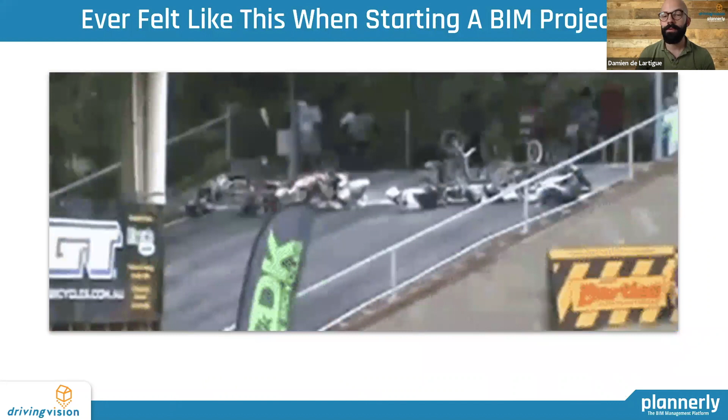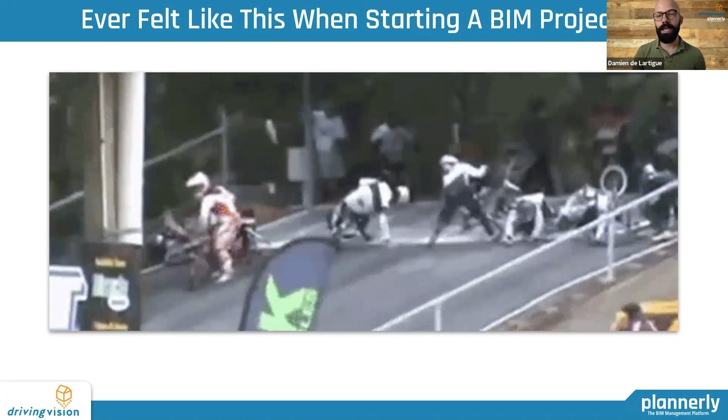So let's start with why did your BIM fail? There are many reasons why your BIM might fail, and maybe it was just a crash right from the start, like these poor guys here. It's actually probably a lot more common than we'd like to admit. People just want to get started and get working, but there are a lot of challenges and hurdles to overcome. Everyone's got different capabilities and ideas. Let's talk about why some projects start like this and what can cause those failures to take place.

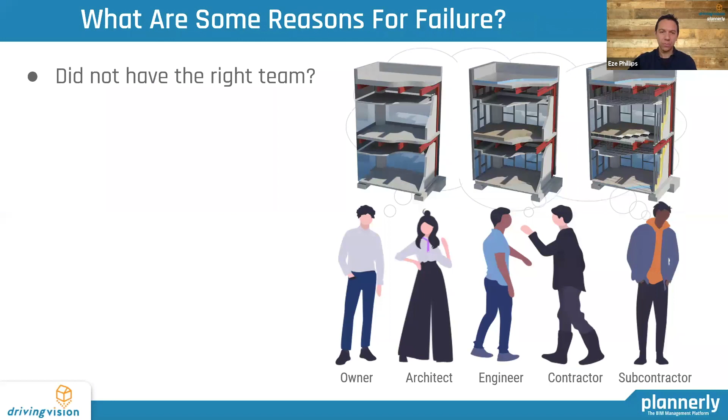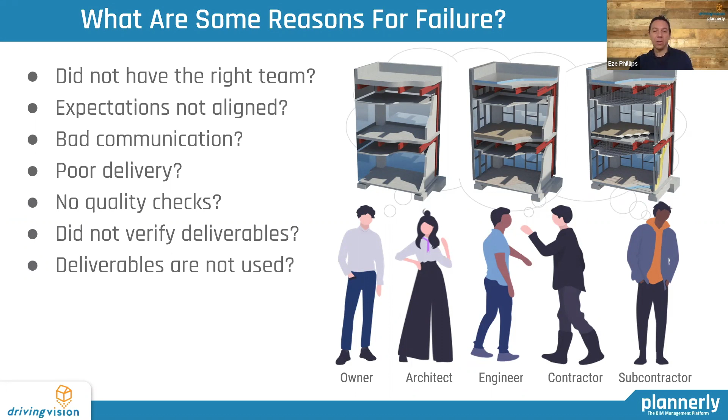Sometimes we don't have the right team involved, and often it's because different expectations aren't aligned properly. It can come down to bad communication between the different parties, poor delivery, no quality checks in place, if we didn't verify the deliverables, or if they weren't even used. There can be a lot of different reasons why, and this can waste a lot of time and effort if we don't get things right.

So firstly, why is it difficult to align expectations? Well, one of the major issues is bad communication, and we see this a lot. There are a couple of examples here of really poorly defined scope. The first one is just one line in a contract where the owner is requesting something, basically saying, 'Can I have some BIM, please?' in the form of a loosely worded statement without any clarification.

But the one we see here defines milestones, and if you're using LOD numbers, a progression from one milestone to another that just goes from 2 to 3 to 4 — it just doesn't always work like that on a project. And that's something that happens more often than you might think. It really does lead to bad communication, and it can have a negative impact on the project right from the very start.

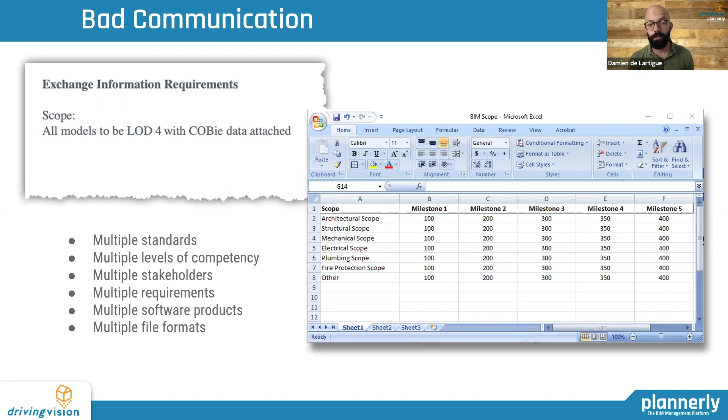So there are many variables to consider. There are a lot of standards out there, all trying to define the elements, the geometry, the accuracy, the reliability, and so on. But as you can see in this chart, we have to decide how much information and how much scope to include. So you add up all the variables, and now you're supposed to fit that all into 5 categories. That's going to be tough.

You might need to ask: what's the measured accuracy? What's the represented accuracy? What standards are you going to follow? What's the purpose, and why are you doing BIM in the first place?

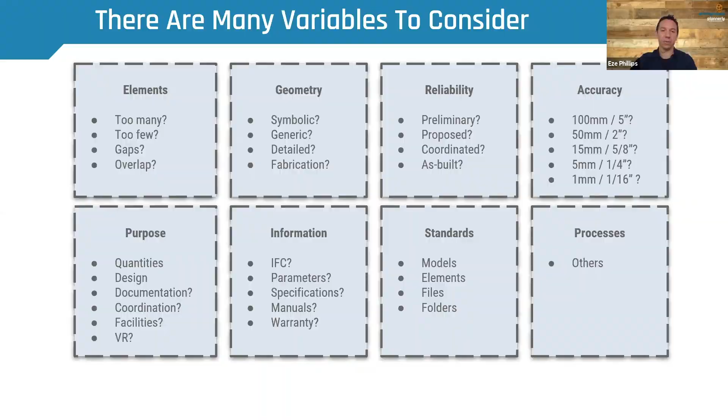So if we did manage to get all that defined, what happens now? Do we just start doing BIM? Is that it? Do we just go? Well, that would be great.

But in reality, without planning, without arranging the sequence of events, and without understanding when those deliverables are going to occur, we end up with bottlenecks, and we get a lot of deliverables that need to be reviewed all at the same time. There are a lot of efficient processes out there that we can use, but if we don't have them aligned internally or have the right tools to support them, we could be wasting a lot of time making sure that they meet the initial requirements that were agreed upon.

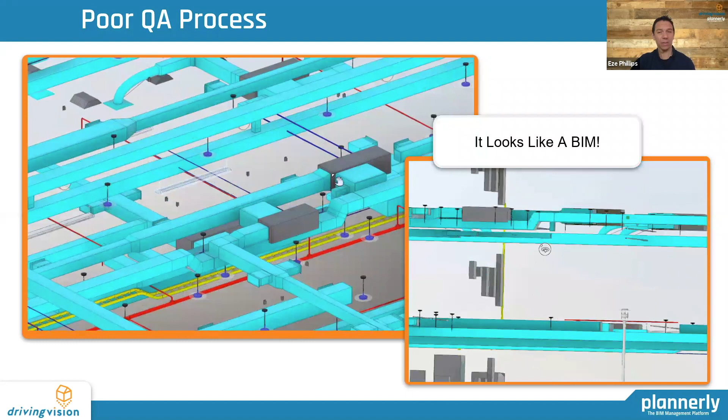So then we need to look at the team, and there are 2 sides to this equation. It's not just the people creating the models, it's also the people requesting the models. Are we competent enough to request the deliverable, and are we competent enough to provide the deliverable? There are 2 parts to that equation.

And competency is quite interesting because BIM hasn't been around forever. So there are new people learning BIM, and they should be requesting, but maybe they need some support in the first few projects. Even if they have a great attitude and pick things up quickly, they still need to gain knowledge over time.

It's important for them to understand where they fit inside a company, what their role is, and what they're responsible for. Knowing this will avoid people overstretching, taking on too much, and making mistakes that will cost time and effort later on.

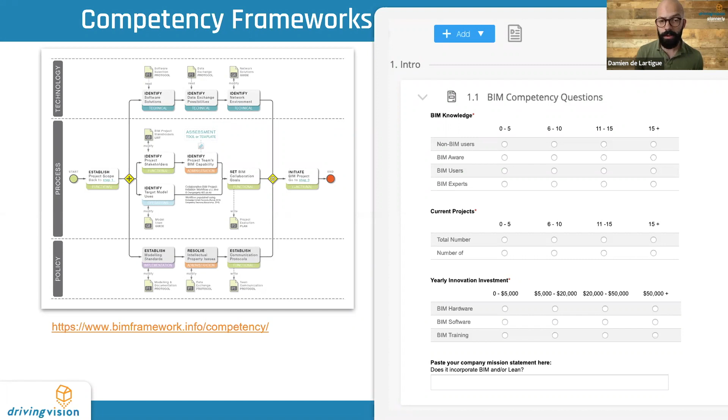There's some really good competency frameworks available. The BIM framework website has some great foundations to build on your own, and some examples, such as the competency questionnaire, which people can send out. This is an example where it asks a company mission statement, and whether that mission statement incorporates BIM and whether it incorporates Lean. So some of these principles incorporated into a company mission statement can really help you understand what that company is trying to achieve.

Let's take a look at what motivates teams. Each team is different, and they might have a different perspective, a different set of reasons, and different goals for doing BIM. They might be an architect, an engineer, a contractor, owner, or service provider, and each of those will have different motivations.

As an owner, I might have read about BIM online, and I might just ask for some BIM. I might want to use it in my design reviews to communicate with the public about what's going on. I might want to sell a property and market that to an external buyer, maybe using virtual reality if someone is in another country, for example. I might be trying to save costs in construction. Maybe I'm trying to optimize my facilities and operations and provide that data to my facilities team.

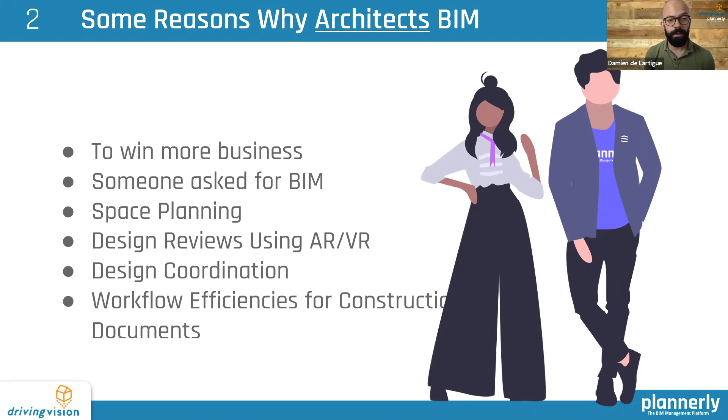So those are some reasons why an owner might be motivated to use BIM. Then there's architects. They want to win more business, keep up with competition, or maybe it's just because the client asked them to use it. And then there's the efficient workflows which they can use and benefit from - space planning, design reviews, using VR between them and the client. Also coordination, workflow efficiencies among the construction document processes, for example. So these are a few examples of why an architect might want to use BIM.

And contractors, they also might want to win more business. Someone else could have asked for it. It could be for coordination to reduce the risk in the construction process, to verify quantities and estimates. Also, it could be for simulations to understand safety or phase planning. These are some reasons why a contractor might be motivated for using BIM.

And then for engineers, again, the obvious one is to win more work just because someone asked for it. But also it can help them with design coordination, system analysis, their bill of materials. And if they have a fabrication team on site, they might be modeling their design and producing that same model for the fabrication facilities. And finally, tracking change orders - so if they already have a bill of quantities and the model changes, you can do a difference in quantities, which will help inform those change orders.

And then service providers - so you have a lot of BIM service providers that are supporting our industry, creating models for projects where there's maybe a gap in the scope. Maybe there's a need for acceleration of the team's capabilities. And really the hope is that they're here to improve our industry more rapidly. So as you can see, there is a variety of motivations for using BIM.

So in summary, many people are using it because they've been asked to do so, or just because they want to win business because it's a requirement on the project they're pitching for. But these aren't really the most ideal reasons for using BIM. What we want to see is people using BIM because they understand and acknowledge that BIM can really help them work better, essentially to gain efficiencies in their workflow. So for the architect, being able to cut 2D drawings much faster, and for the contractor, getting quantities for estimating. There's so many good reasons everyone should be using BIM in their workflow. It's important to use BIM for the right reasons and motivations.

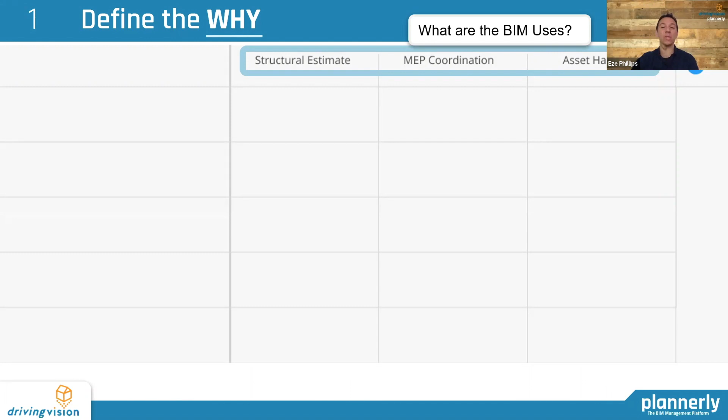We can then define the scope. Each information delivery milestone needs a certain amount of scope, which is really just defining the what, the list of items that we need to use. And then there's how much is required, whether that is LOD or the right level of geometry, the information required. Define what we need at each milestone.

The most efficient and successful workflows we've seen are those that only progress when needed. So if we need something in 2D, we'll get it in 2D. But if that changes and we now need it in 3D, then get it in 3D then. Really focus on when you might need these objects and when they need to progress in detail.

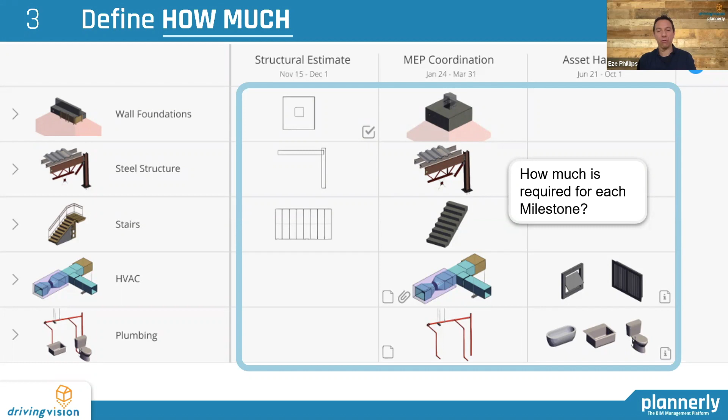So what's the geometry, what's the documentation, what's the information? Define how much of these is required for each information delivery milestone, and also understand who is responsible for it, especially when you have a handover.

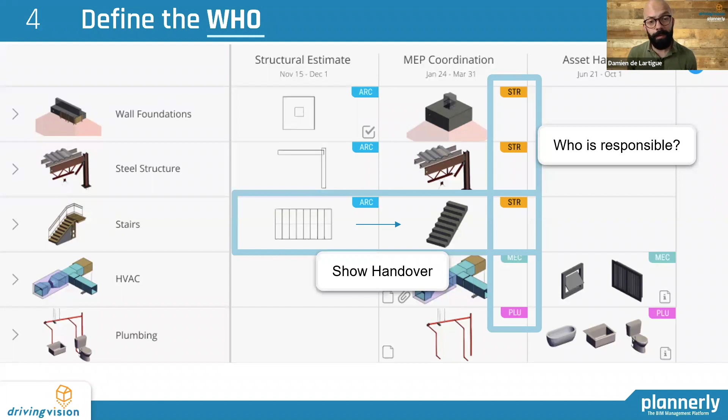For example, with stairs that were required only in 2D for a structural estimate, and then later on at a different milestone, the structural engineer was involved for an MEP coordination that was required in 3D. That's when the 3D modeling for the stairs needs to take place.

We've seen an amazing 53% reduction in issues based on being able to sequence the tasks for each of those milestones in an order that makes sense for the teams, so there's less rework. It's an amazing ability to have a delivery sequence that makes sense, and that way you can put things in place once rather than having to do the same task over and over once you've made a decision.

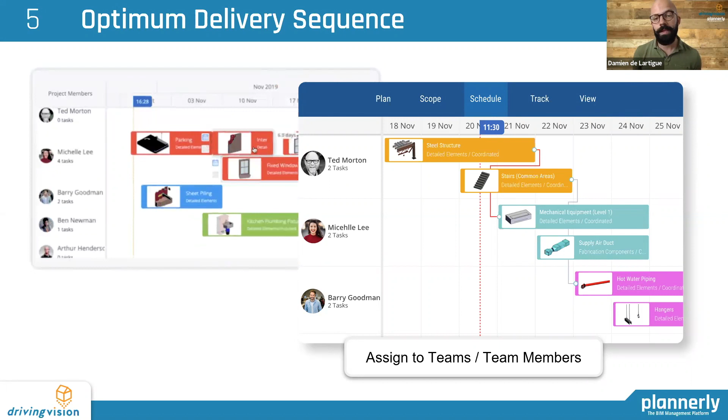So we've looked at why projects fail, what motivates teams, and then some simple steps on how you can get the right BIM. You could refer to those steps as a recipe.

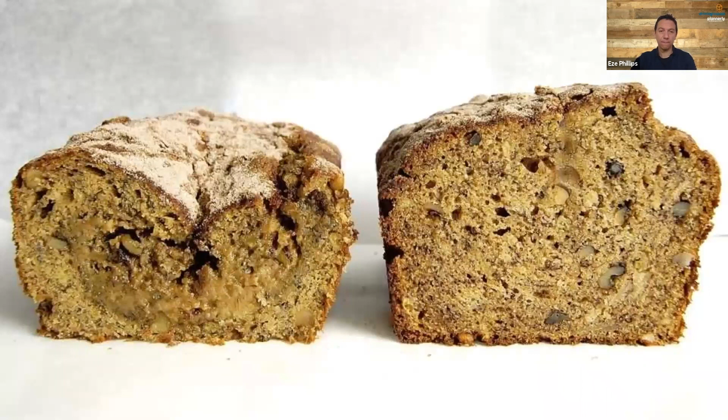So then the question would be, well, how do you know if your BIM is fully baked? How do you know if it's ready to go? Well, here we go. We've got some banana bread.

It's really trendy at the moment. That's one of my favorites as well. But there's a massive difference between the half-baked bread on the left and the fully baked bread. I'm not sure about you, Eze, but I'm not a huge fan of the stodgy half-baked stuff. It's a bit like the great BIM bake-off, I guess you'd call it.

Yeah, it definitely needs to be fully baked, I would say. How do you know when your BIM is ready, though? That's the question, isn't it? How do we know when it's ready?

You put all this work and effort into place, and when it comes to making the bread, like in our analogy, you follow the recipe. You make sure the oven is set to the right temperature and so forth. But for BIM, how do we know when it's ready?

Well, we assume that it's ready, or maybe we're told that it's ready. This is one of the main problems we see. We just have a start date and a due date, and then everyone shows up on the due date and says, 'Here you go.' They hand over their information all at once, and now you have this massive bottleneck trying to work through all the information you've been given.

This can cause so many issues. There might be clashes, things are missing, items are in the wrong place. This leads to a lot of finger pointing and angry emails from people who didn't get the information they were hoping for. So if you can come up with a smaller, bite-sized process to deliver in sections, rather than having everything dumped on you all at once, you're going to be a lot more efficient that way.

Yeah, so we've seen that using Kanban boards to understand tasks and having each person who's responsible for those tasks simply drag and drop to show what's ready for review. It doesn't have to be the full model.

It could be just a few elements. Just being able to say that this is ready for your review really helps break up the bottleneck and alleviates a lot of the pressure to get everything done at the same time.

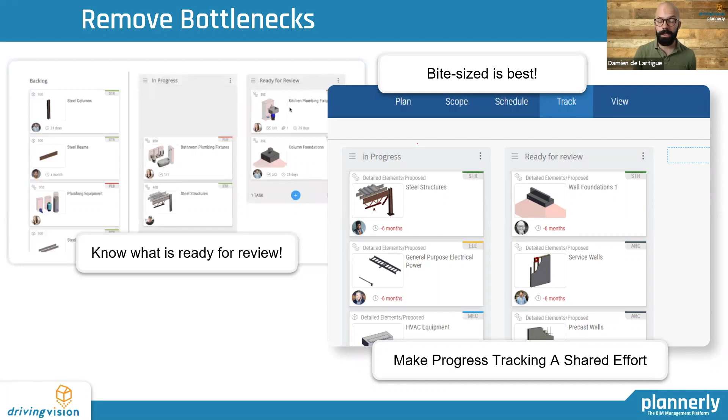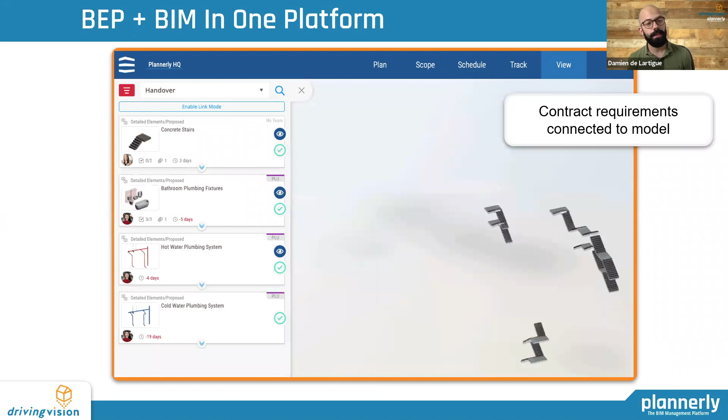So once something is in a bite-sized form, how do we check that it's ready? Well, it'd be great if you could have the BIM execution plan, the BIM requirements, the BIM scope, and the BIM deliverables for that milestone all in the same place as the BIM model. BEP and the model in the same place, that's really cool, right? That makes things a lot easier.

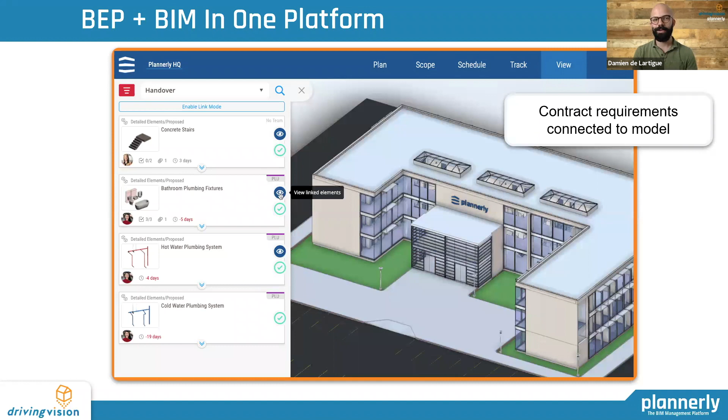Yeah, definitely. And then also being able to sort the elements for QA. For example, the light fixtures or the wall sockets. These are all distributed throughout the building, but imagine if you can review them all in one place, bunch them all into one group and check everything is correct. Imagine being able to explode the building, sort it out into these groups, then you can go through the QA process in a much more streamlined way.

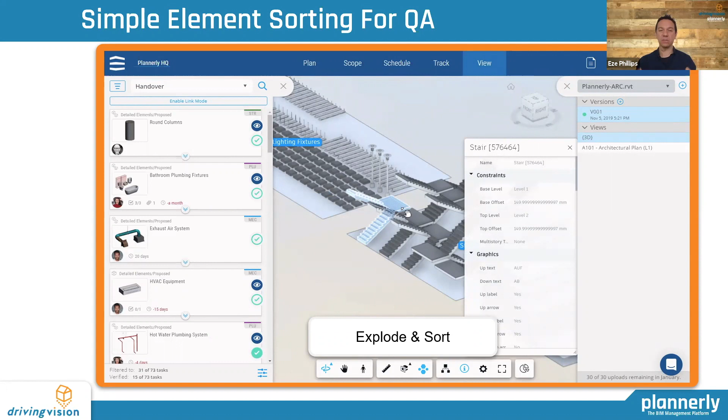So we've talked about when to check, now what to check. So if you have a set of requirements, maybe there's warranty details, like on this example, and material is required, and going through that to check that the geometry and information requirements are present is a really important step. So rather than producing that model and then delivering it before you've checked it, make sure everything gets checked off as you go. And that's a really, really powerful way of working.

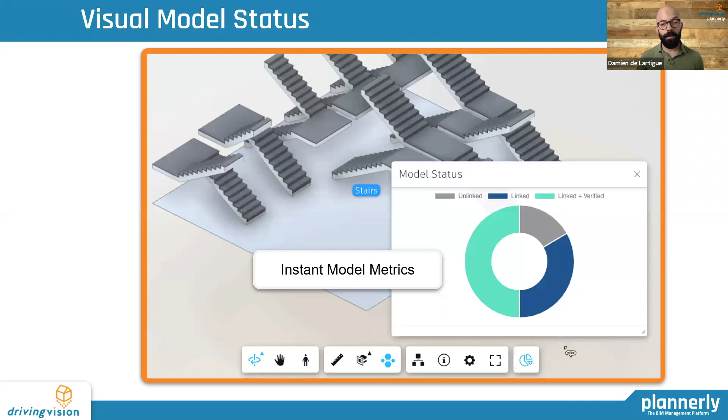So now, how do you track the progress and make sure you're in compliance? Usually it's just a checklist that you go through and you check everything off one by one as you go. But imagine if you could connect that to your BIM tasks and visually see the model, filter and hide what's been verified and what's been updated, and then tick it off. I mean, that would be a huge improvement, right?

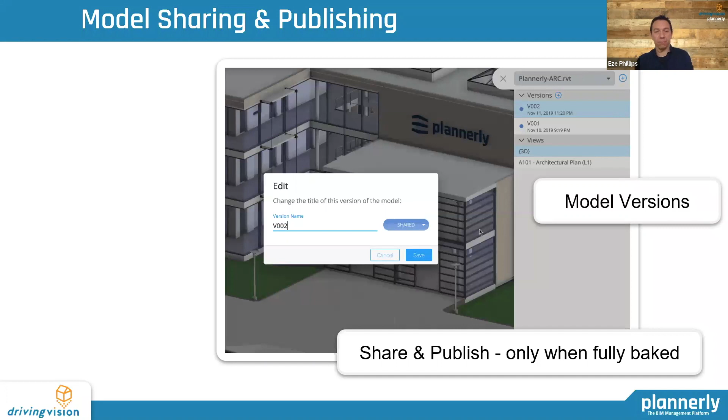Yeah, I agree. Also, how about making sure that when you have a model and that checklist is finished, that is the only time that you share and publish the model once it's been done. It's a great way for everyone to know what the status is on the milestone once it's been published. Everyone can get involved at that time, not before. And now they can open it and review it, and now they know what to do with it.

So finally, we're talking about BIM compliance. It's really important, but a difficult part of the process when you've got a model or lots of models all at the same time, and you haven't really got a way of checking them against the original requirements. So we need to consolidate those requirements and make sure that you're reviewing them against the checklist before you share and publish them.

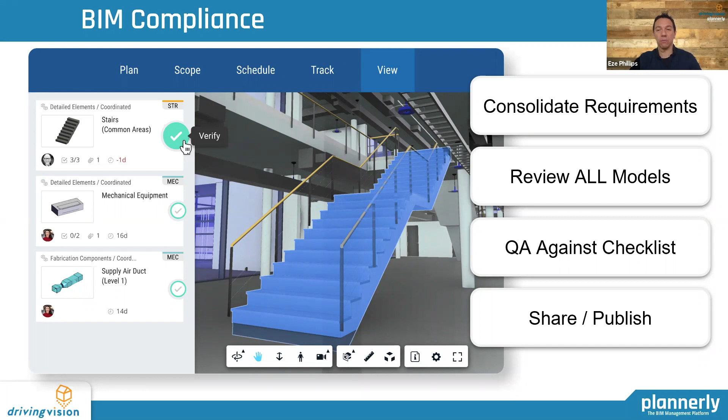In conclusion, we talked a lot about the motivations of people, but how to get the BIM that you paid for is a series of steps, and it starts from understanding why people are going to do BIM in the first place. Yeah, and also understanding what you wanted to pay for and what it is that you really wanted out of that model, and making sure that if you understood that, did everybody else understand it as well? We can't stress enough how important it is to make sure everyone involved understands and knows what those requirements are.

Yeah, and also being able to sequence, track, and manage them. Make sure that when you're reviewing them, that is connected with the requirements and deliverables. You can see how much of the model has been approved. Not having to approve the whole thing before you can share it, but being able to share and publish as you go. Well, great. That's the end of today's session.